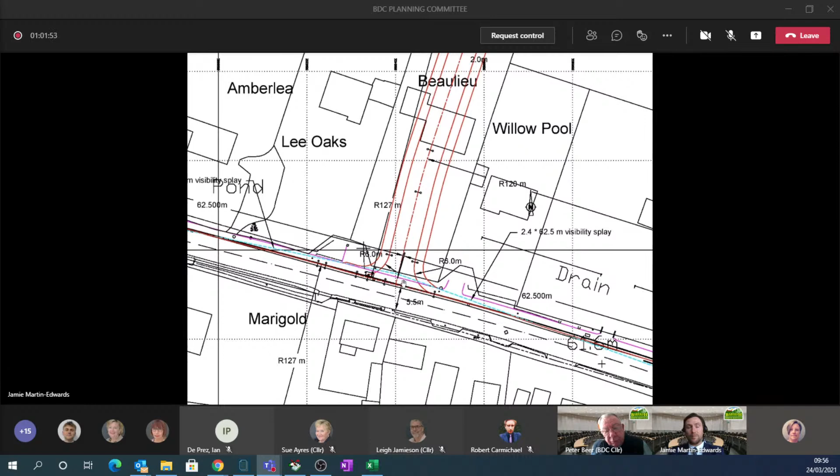If I just zoom in a little bit, the blue dotted line denotes the visibility splays, and we can see that we've got 62.5 metres either way on the visibility splays. You'll also notice some of the objections we've received say that this visibility splay crosses third-party land. We can see here quite clearly that it goes right up to but does not cross third-party land. It always stays in highways ownership, so there's no concern that the visibility splays would be impeded in this instance.

Also in terms of some of the objections we've received, we see up here that the footpath alongside the access into the site has been denoted as being 2 metres wide. We expect that would take place. There is no additional annotation for the footpath width in this area, and it would be logical to assume that the 2 metres means it's for the whole footpath. It doesn't - I've measured this on the scale drawing. It's less than 2 metres here, as set out in the report. There will be a widening of the footpath here, which I'll come on to in a little while.

There has been a speed survey that's taken place on the High Street, and this has seen an average speed of around 38 miles per hour. This would mean that we'd have enlarged visibility splays compared to what we'd normally expect in a 30-mile-an-hour zone. The 62 metres doesn't quite match what we would expect in that instance, but we also have a suite of improvements to the road in terms of speed reductions, and that has satisfied our highways colleagues, and these will be captured as part of a Section 278 agreement.

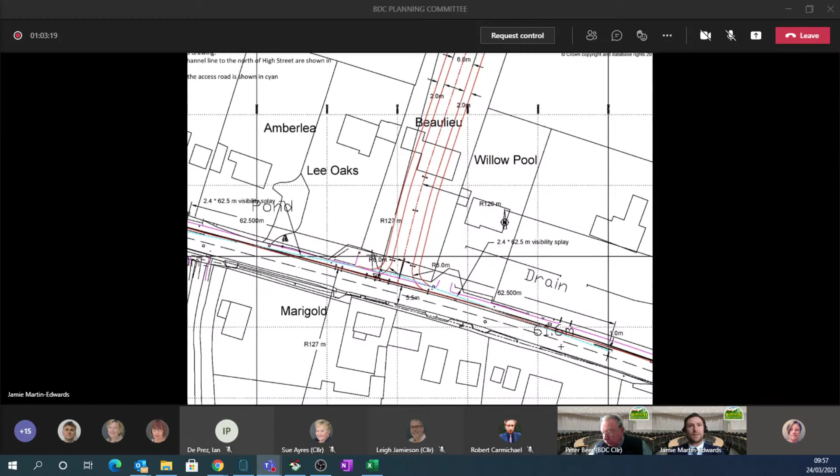I understand that conversations and discussions had been ongoing with the Highways Department as part of the extant permission already. And I think what is also important to note is that this access has already been approved under the extant permission in 2017. This particular drawing has also been discharged under that extant permission with Suffolk Highways' approval to say that this is an acceptable access. So we have technically accepted this as an access twice over already.

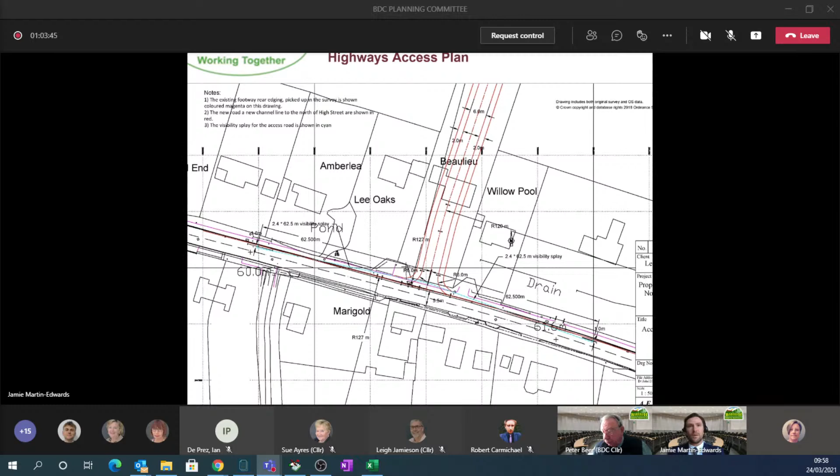So I'm just going to move on to some of the proposed speed reduction measures. I think it's really clear to add for members here that this is not going to be controlled at this stage as an approved document. There is a condition that the Section 278 will need to come forward as part of the highway agreements, but this is just indicatively showing what could come forward. These conversations are ongoing with our Suffolk Highways teams at the moment.

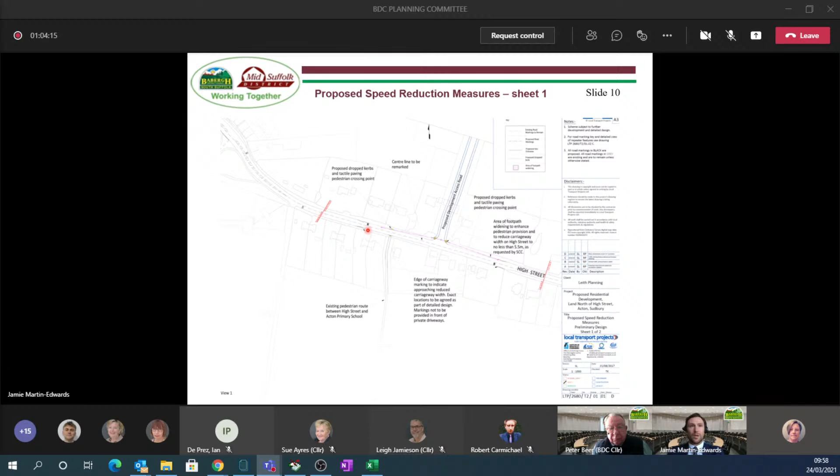So we potentially will see a drop-down kerb and tactile paving opposite a footpath that runs to the primary school. So anyone that occupies the site of development will be able to use the path all the way around and then cross the road at the drop-down kerb, tactile crossing point.

We also have edge of carriageway markings that will be going in approximately here, notifying that we've got a reduction in speed of the carriageway. And this is the area where we'll be looking to see the footpath widened, and as a result that will see a reduction in the road width, but no less than 5.5 metres, which still meets highway standards that Suffolk Highways are happy with.

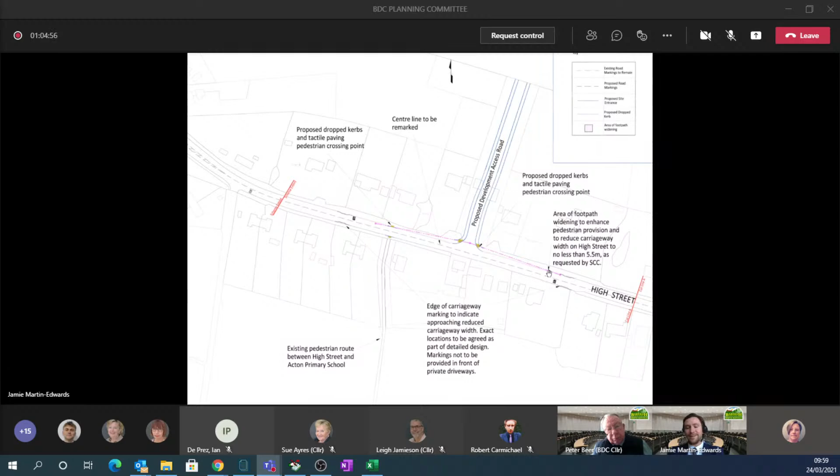And again, just some more of the suite a little bit further out in terms of the improvements, some further road markings to denote the 30-mile-an-hour speed limits. This is the type of thing that we might envision here, again to be agreed with Suffolk Highways under the Section 278.

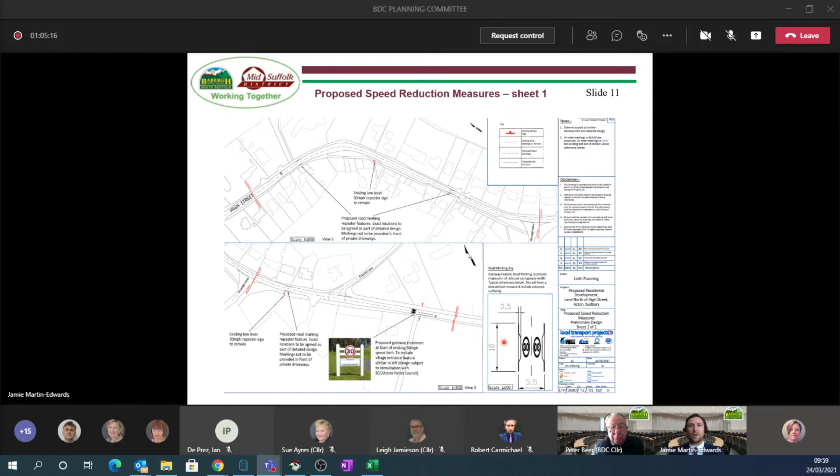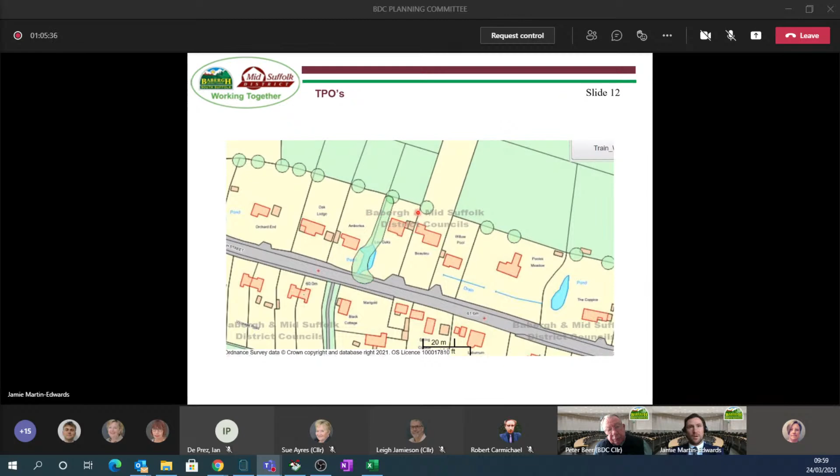So I'm just going to go back to where the access is going to come in. This is where the access will be, and this is the house that's to be demolished. These green rings highlighted here are TPO trees with protection orders on, as well as this one. This tree within the access area is not to be removed. This is taken from the tree report submitted as part of the application.

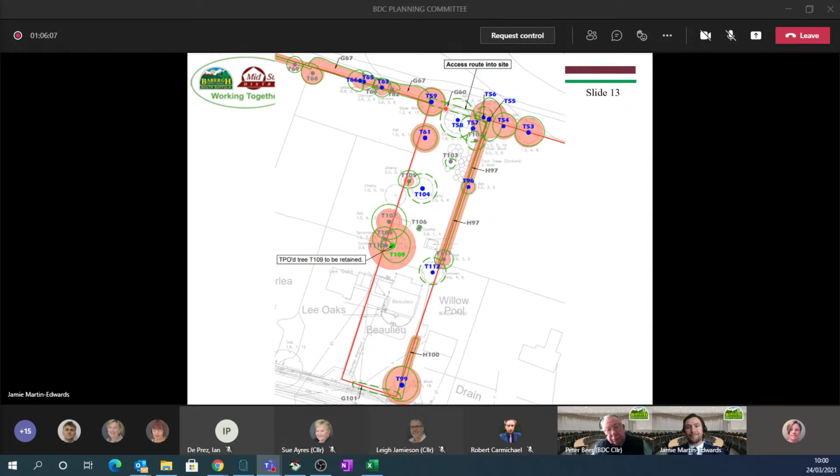Next slide is more of a concept plan. There's nothing here that we will be conditioning against because that's settled for reserve matters. The applicants have submitted this detail in terms of what could come forward. I don't think there's anything here that we really need to dwell on, because we can't expect that they would exactly look like these images at reserve matters - it's just an indication of what could come forward.

And again, an idea of a scout hut at the top here. I think it's really important to note that the development will not be building the scout hut, but rather gifting the land to the scouts for them to develop this hut themselves.

This is a conceptual layout and drainage plan that was submitted. This was a requirement that was different to the 2017 approved permission. This is requested by the Flood Authority, and this basically shows how the drainage can fit into the site alongside the areas for development. There's a couple of key points that I would like to highlight here.

At the moment, we're only showing a 15-metre buffer on the eastern boundary. As part of some of the ecology requirements, they will need to see a much larger buffer on this edge, so we can anticipate that some of these roads will look slightly different at reserve matters. You'll also note in the design section of the report that I've given some pointers to say we're unlikely to support a design layout like this because it's very rigid, particularly with a road that runs straight through the middle of it. So we can expect that reserve matters will see a slightly different scheme.

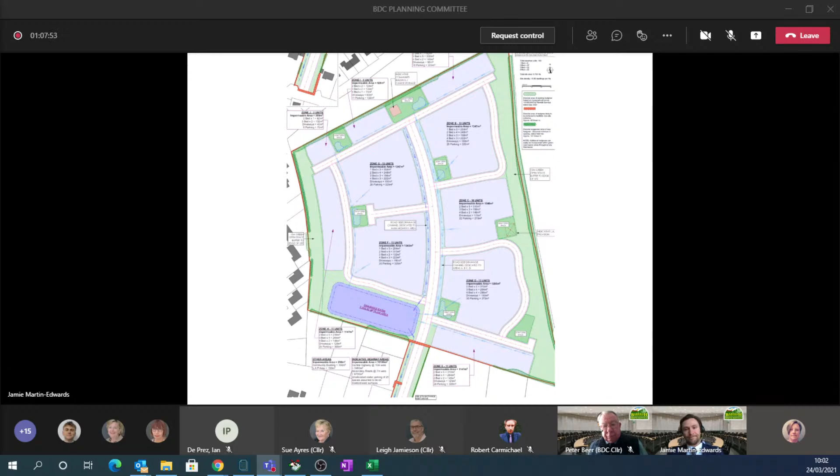So I'm just going to move on to landscaping now. The landscaping was provided with a visual impact assessment. We can see here the red line plan for the site, and a network of public rights of way to the north, to the south and to the southeast. In essence, all of this area here is not visible from the site, or to the site I should say.

I think the key things I want to highlight here are footpath 12 and footpath 2. This report shows, through photographic evidence, that the rest of the footpaths can't see it due to the valleys to the north. So if we start with footpath 12, this photo has been provided, and I'll just do a little zoom in so you might see it in a bit more detail.

You can just see the tops of the houses there of Barrow Hill. This red line does not denote the height of the development - that's something for reserve matters, and we definitely wouldn't expect to see height shown like that. But that was some concern raised in objections, that perhaps this was denoting the height of development. I can assure members this is not the case - we're looking merely at the approximate extent of the site in terms of width, so the boundary lines here are just denoting that.

So we're very unlikely to see any landscape impact at all of the site from footpath 12 to the north. And then when we look at footpath 6, a lot more close up, again these are the rear of the houses on Barrow Hill. This is approximately where the allotments are, and you're likely to see some roofscapes come into this space here. So a very negligible amount of harm is taking place in that instance.

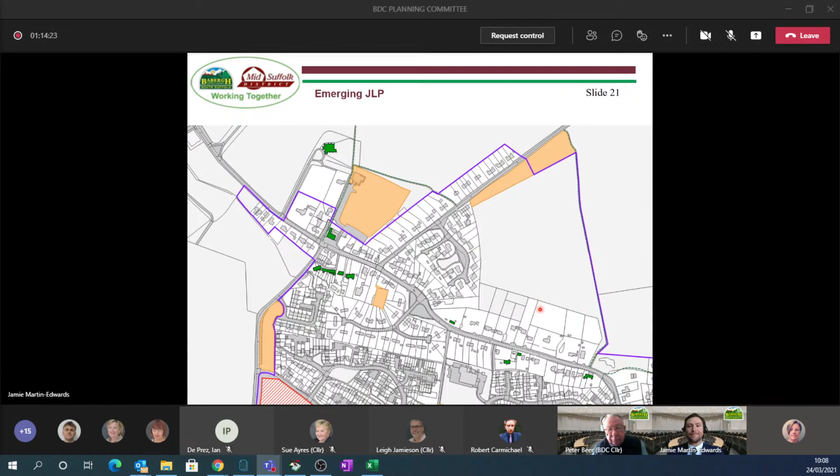In terms of conditions, another important note is that we've spoken to the applicants and agreed that this new permission would have an 18-month deadline to submit reserve matters against. We'd ordinarily see at least a 2-year one, so we've reduced that to improve the deliverability of the site. Again, the majority of other design considerations, such as plot boundary treatments, hard and soft landscaping, have all been conditioned in this instance to come concurrent with the reserve matters, allowing a cohesive approach to design later on.

This is something the 2017 permission didn't do, so we might see scale and layout provided, and then hard and soft landscaping treatments come later via condition. Through this one, we're advising that we capture it all at once and make sure we get a really good proposal come forward at reserve matters, which I think is a good point.

I've got some slides to go through in terms of photos. There's quite a few, so I'll skim through them. If you keep a note of the slide number and where the photo's been taken from, I can always come back to it, but I will skim through them. Do let us know.

This is from within Gottsfield, looking over the top of the bungalows. The site's just behind here. We may see some roofscape come into this space. Looking up to Barrow Hill, opposite the Acton Wildlife Community woodland, you can just see the site in the background here. This is the last house on this side of the road.

Just stepping inside of the woodland, this is a fence line of that house, and you can see the boundary along here. The site is higher on the northeastern side and slopes downwards towards the village on this side.

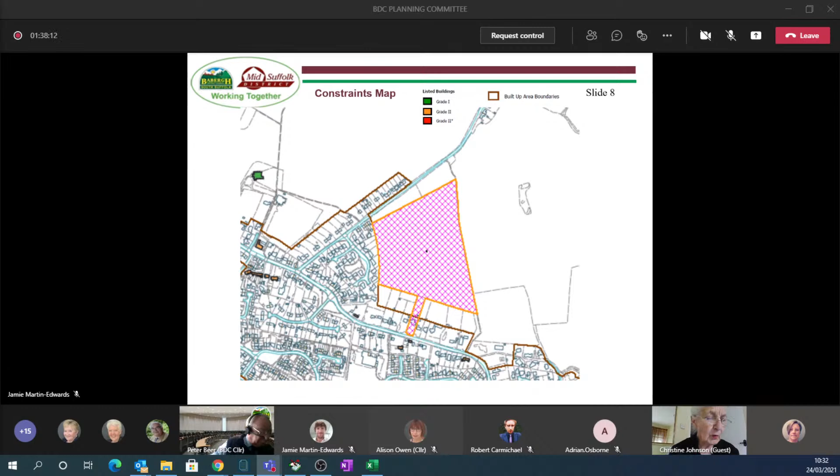I would just like to continue that to create an acceptable visibility splay, which the Highway Authority acknowledges will have to be below its normal standards. The developer will widen the footpath along the road, thus reducing the road width to 5.5 metres, less than the width suggested for the new development on the main road through the village. The C711 is a regular bus route, and the required width for a bus route is 6 metres. The road is used by large vehicles accessing the industrial estates at either end and by agricultural vehicles. In order to pass each other, they will have to drive over the newly widened path.

The parish council believes the decision taken in 2017 was wrong, but understands it was inevitable because of the constraints imposed upon you at that time. You had no choice, but you do have a choice now. Since 2017, the site has been actively marketed by Leith Planning, whose own website says they are experts in their field with a proven track record of delivering projects on time. Yet they've failed to find a buyer in the last three years.

A site with outline permission for 100 homes in a Suffolk village should have been snapped up. The original intending purchaser withdrew. Since then, two companies have surveyed the site and the road in a very detailed manner, but nothing has come of it. Why not? The applicants cannot blame the pandemic - other sites in the area have sold and work commenced.

The parish council considers that in view of the unproven housing need, the current construction of 100 homes at Tamage Road, which happened after you gave permission for this site before, and the contrived vehicular access to the site, you have sufficient justification for not renewing this application, and urges you to refuse consent as it would appear the site is unviable. If you are minded to give consent, however, then we ask that conditions imposed should include the provision of large green buffers to protect the Acton wildlife site and allotment land.

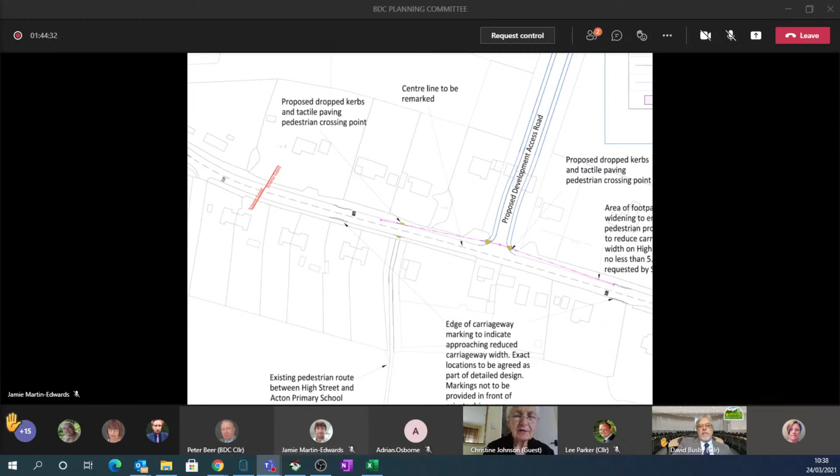Yes, absolutely. But there's no edge to those, and we would like to see something put in place to prevent vehicles from driving right up to the edge and damaging their fence. The lady living in Spring Cottage is very...

I'm going to have to stop you there, Mrs Johnson, because you're getting into our debates. No, hang on a minute, let me just finish. I think those points about the road width, I'll get the officer to comment on them, because this is not the first time we've heard that road is narrower and two vehicles have difficulty passing, or large vehicles. So I think we need to get that clarified. Councillor Busby, had you got your answer that you wanted? Because we did go a bit wider. Yeah, thank you. Right, thank you.

I've got Councillor Ayres, followed by Councillor Hinton. Thank you, Chair. Thank you very much, Mrs Johnson. I just wondered, thinking about school places, do you know if there are any spare places at Acton Primary School? There are no spare places, nor is there any land on which to extend the school, unless you put an upper storey or something like that. They've used up all of their land, really.

Right, thank you, Mrs Johnson. Councillor Hinton, thank you Mr Chairman. Morning, Mrs Johnson. Just a quick question on public transport, because a lot is always made of public transport and the fact that it'll green up everybody's agenda. How frequent is the bus service through to Sudbury? Because we saw one big bus there, but presumably the school children have to go by bus as well. Oh yes, all the school children go by bus. We have a bus run in the middle of the day. At the moment it's on a special COVID timetable, but normally it's one hour in either direction to Bury and Colchester, going through Sudbury, Long Melford, Lavenham, all those places. There is also a little town circular bus, but that only runs three times a day and isn't much use to anybody, because you can go to the town on it, but you can't come back again. So I've never quite understood the point of that.

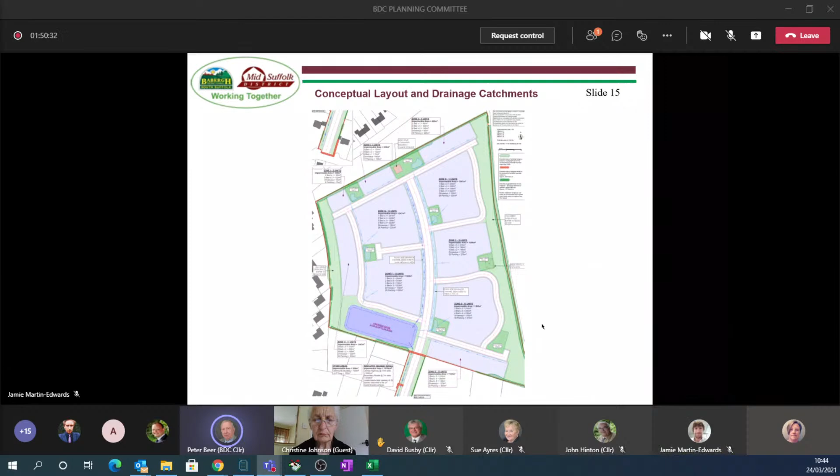Concerns of residents remain the same as those raised in 2017. The legally binding restrictive covenant on Beaulieu remains in place and is being completely ignored. Suffolk Highways' visibility splay Y dimension of 62.5 metres is not being met, ignoring the joint ownership of the party hedge shown for removal, and the use of a 1 metre travel distance from the curb, which is not possible due to road width, are no more than failed attempts to increase the Y dimensions.

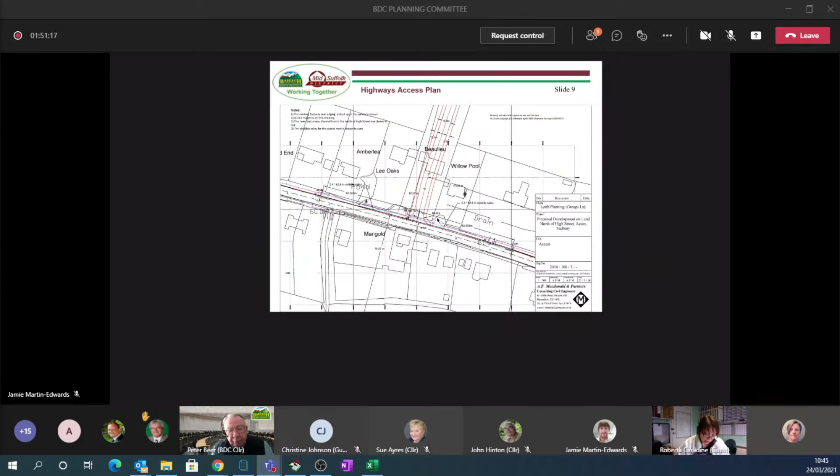The properties on the south side of the High Street already experience significant vehicle erosion, yet the proposed pavement widening would push traffic closer to these, which include listed buildings. HGVs and buses often mount the pavement when passing one another, and the proximity of traffic to pedestrians is alarming. The predicted rush hour figures are woefully inaccurate and based on out-of-date information. It also omits the traffic implications of the Scout Hut.

The Commissioner states the district has 950 scouts and is proposing this will be the area's HQ. Journeys will have a similar effect to that of a school—these could be a daily occurrence with a succession of meetings from various age groups unless restrictions are put in place. The village continues to experience drainage and sewage issues, low water pressure, periods of low power, and telecoms at full capacity. Basically, the infrastructure is already struggling.

The development of 100 homes on the Tamage Road site has started, with developments in Chilton and Great Waldingfield, which means there is no unmet local or district housing need that would necessitate accepting this speculative proposal. As the Community Speedwatch Coordinator, I can confirm vehicle volume and speeds have increased significantly since 2017, and yet no new traffic survey has been commissioned.

Concerns about speeding and overtaking on the High Street have led to a request for an SID deployment from the Camera Safety team, and additionally HGV usage has increased to such a level that the parish council is being urged to apply for weight restrictions for this C-classification road.

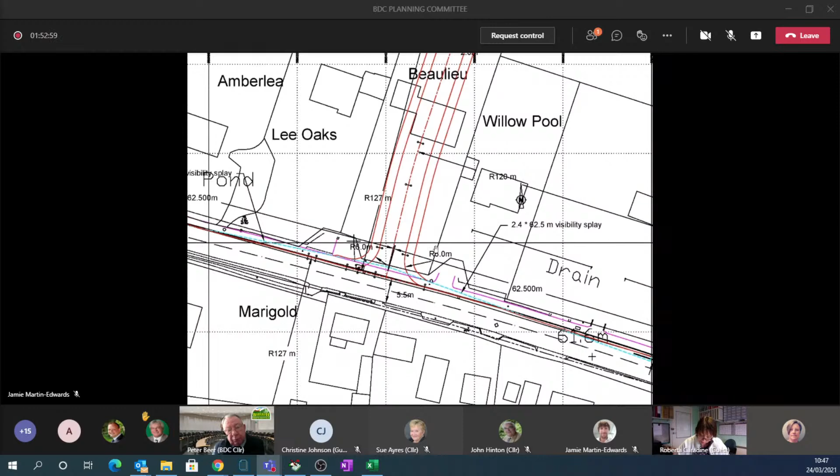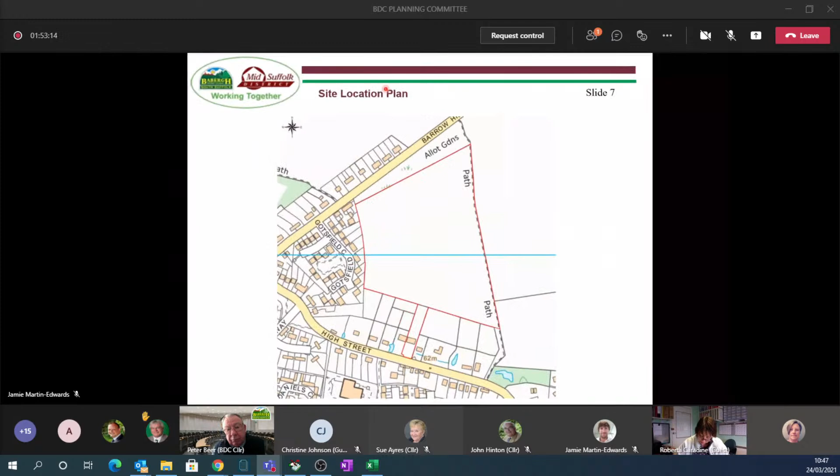The area in question has been used for over 40 years as a local amenity, and over the past 12 months has become even more important to residents' health and mental well-being, whilst offering a home to an ever-increasing range of wildlife. Residents question the validity and viability of this site with its contrived access. The additional traffic flow and impact on the utility infrastructure will be to the detriment of the whole community.

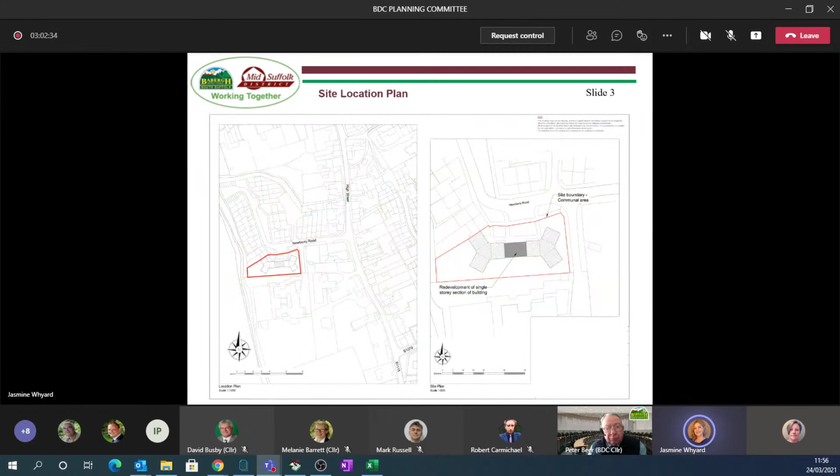This is the site location plan, which goes around the whole of the Hill House building, which is in residential use, and the communal garden areas just around it as well. The proposed dwelling is shown on the right-hand side and is contained to a small single-storey central section of this main Hill House building. The remainder of the Hill House building was formerly sheltered housing, but has since been converted to 12 flats, comprised of 6 flats on the ground floor, 6 flats on the first floor.

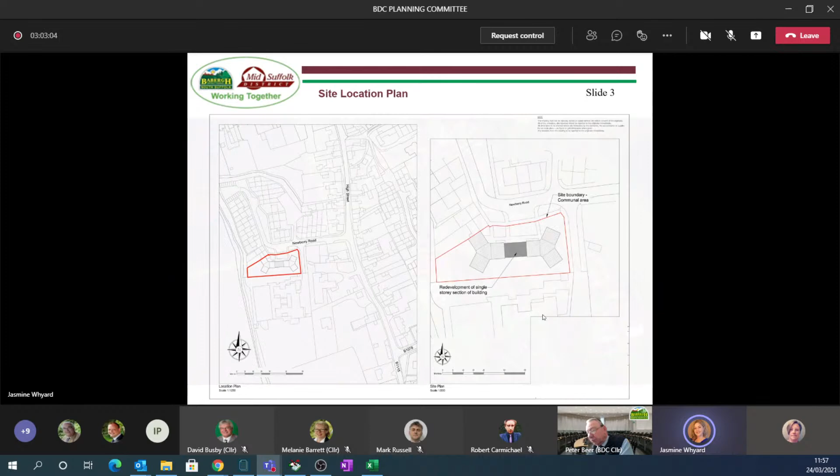So looking west towards the site, on the left-hand side of this image, you can see the site just here behind these mature trees. And as you can see, it's this single-storey portion of the building.

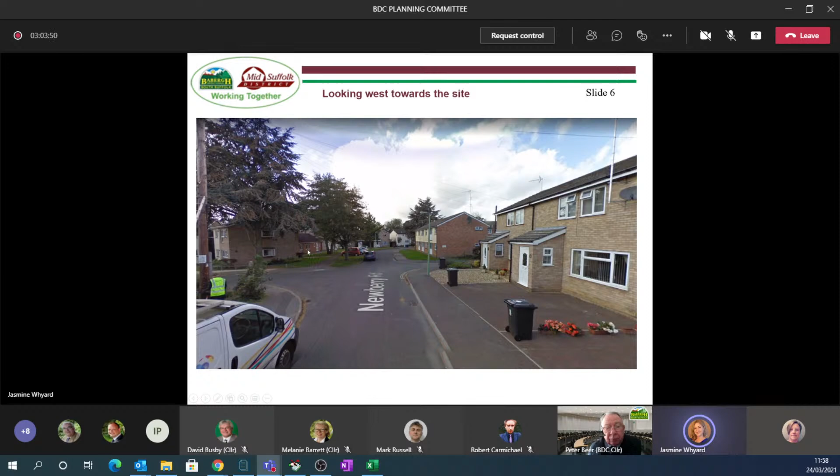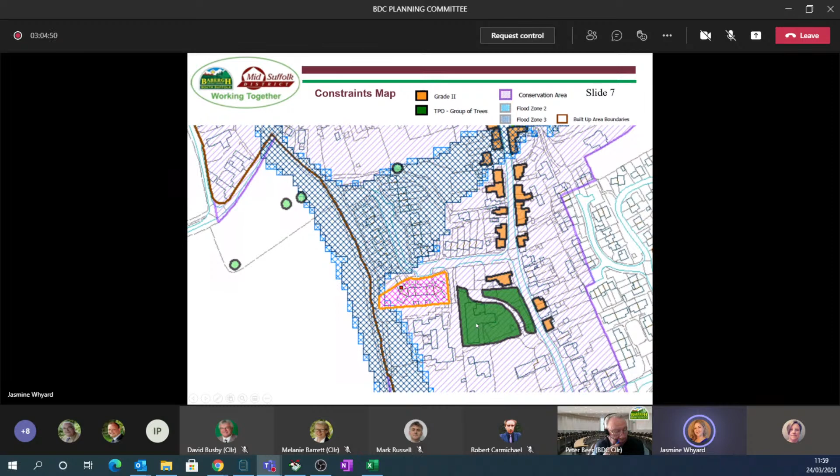This deadline for removing works or applying to retain them has been moved to this year, I believe - I'm sure Ian could clarify that later for us. However, the council had already submitted an application to retain the works carried out and the change of use, in order for the building to continue to function as a dwelling.

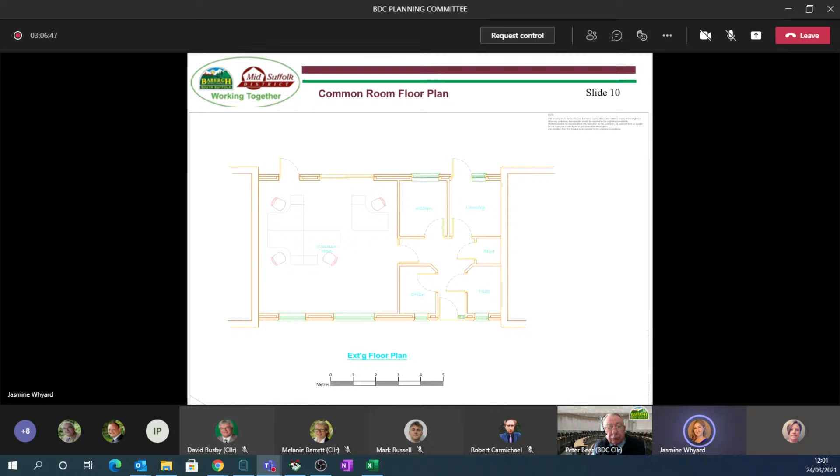There is also a store/heating cupboard, separate from the dwelling, just to the back, which is accessed from the rear. This is to be used and accessible for maintenance purposes associated with the wider Hill House building and is not in use in conjunction with this dwelling.

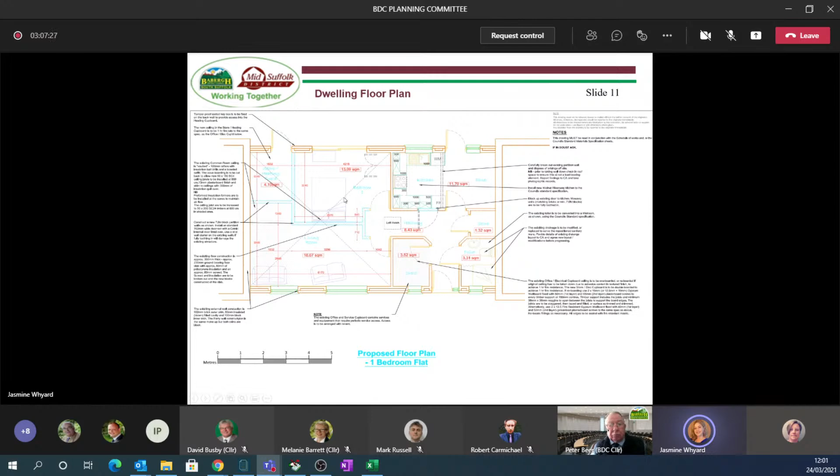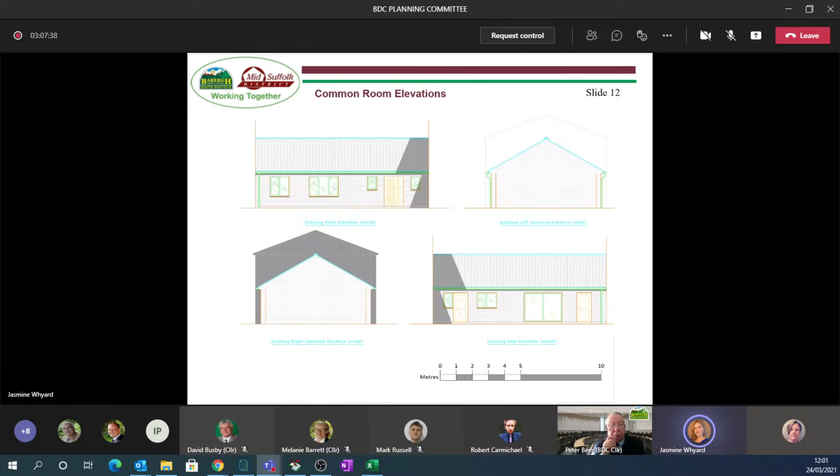We've then got the common room elevations. This is the original common room elevation shown here. As you can see, it's got a very modest and simplistic appearance.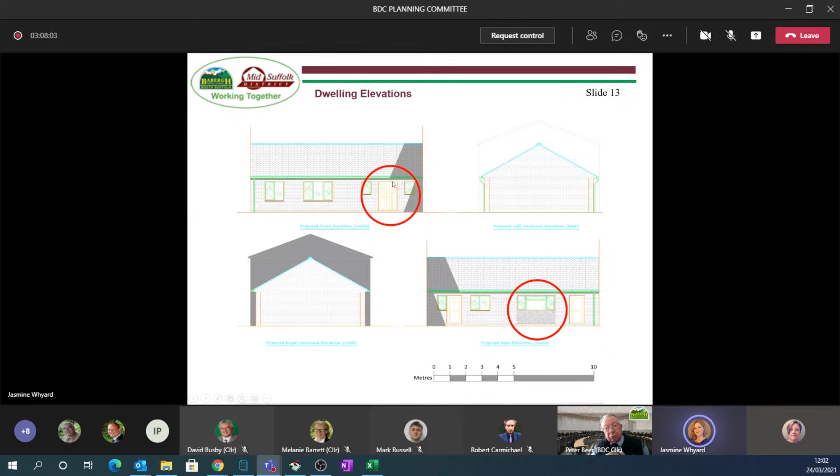Moving on, we've then got the proposed elevations for the dwelling, which has been converted. The red circles are just to show you the only external differences that have occurred in converting the common room to a dwelling, which involved the partial blocking up of patio doors to just a window and a panelled area, and then just changing the front door.

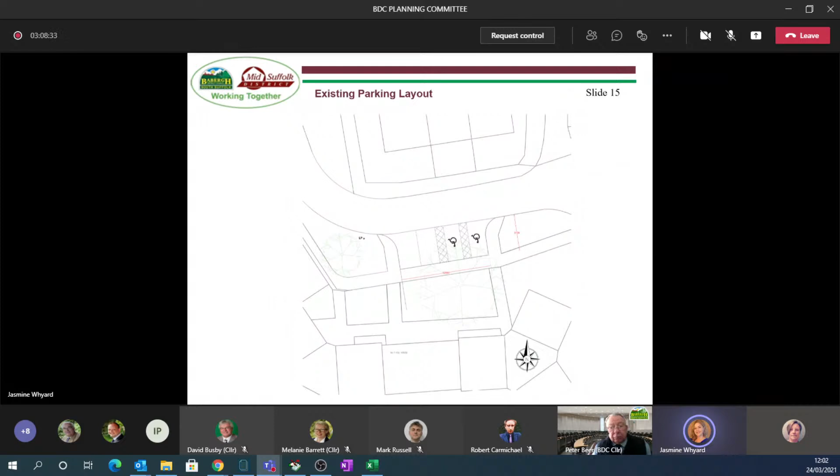The existing parking provision comprises 4 bays to the front of the site, including 2 disabled bays. The proposed parking upgrades to the existing bays have not yet been carried out, unlike the works to the existing building, but as part of retaining these works they are to be upgraded, including creating a new bay and relocating the existing footpath to the west.

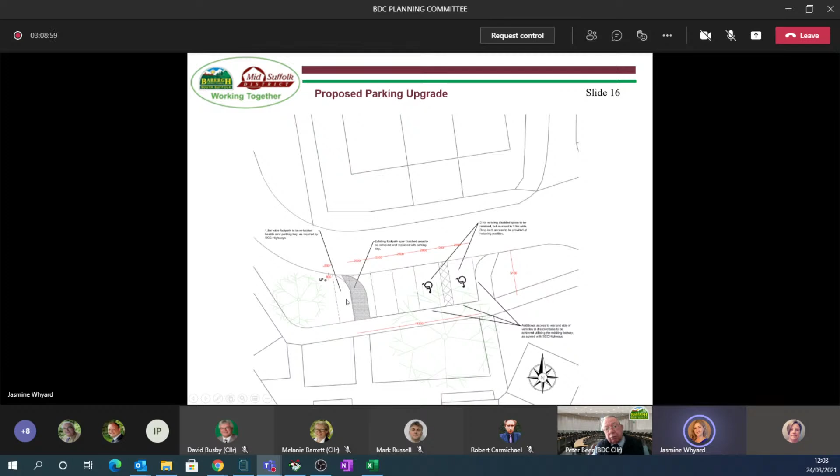The recommendation is therefore to approve this full planning application for the reasons set out in the committee report. Thank you for listening.

Members, have you any questions for the case officer? No hands have gone up. It seemed reasonably straightforward.

Chair, we've got Councillor Hinton. Councillor... oh God, I can't say it again. I'm trying to find you. Right, Councillor Hinton, if you'd like to put your question.

Just a couple of quick points for the officer concerned. The report states that there is no planning history for this. When was it converted from sheltered accommodation to 6 flats?

That is not something I am entirely sure of. I know the existing building was built, I think, in the 1960s, and sometime recently, when they reviewed council-owned land and the housing needs we have, that's when that happened. But it's not strictly relevant to this application because this application relates solely to that single central portion.